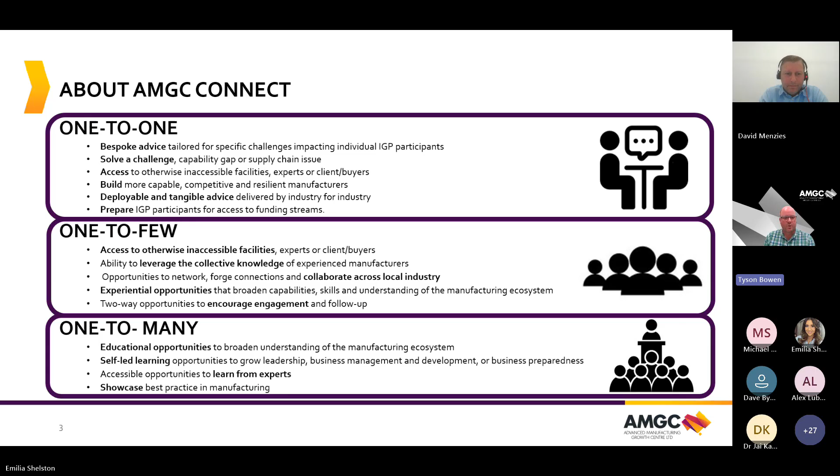Next slide, please. And today we're joined by Dr. David Menzies from Additive Assurance. Additive Assurance is a company that AMGC knows well. We worked with them to help in part commercialise their product. And their product and services is all around guaranteeing and assisting with the quality of additive manufactured products. So I'm not going to speak for much longer because you're here to hear from David and the team. We will now switch our slides from AMGC to David's and we'll get underway.

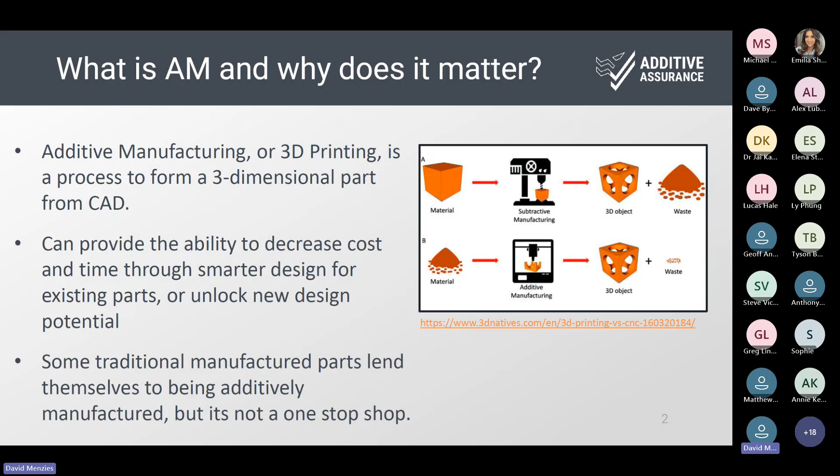So additive manufacturing, there's a large swathe of different techniques here. Some of them are suitable for different processes. A lot of them have started off as a prototyping tool, but are now moving into production. What we're going to focus in on is powder bed fusion, and in particular the laser-based powder bed fusion, which is the area that we operate in, which is largely referred to in general as metal additive manufacturing.

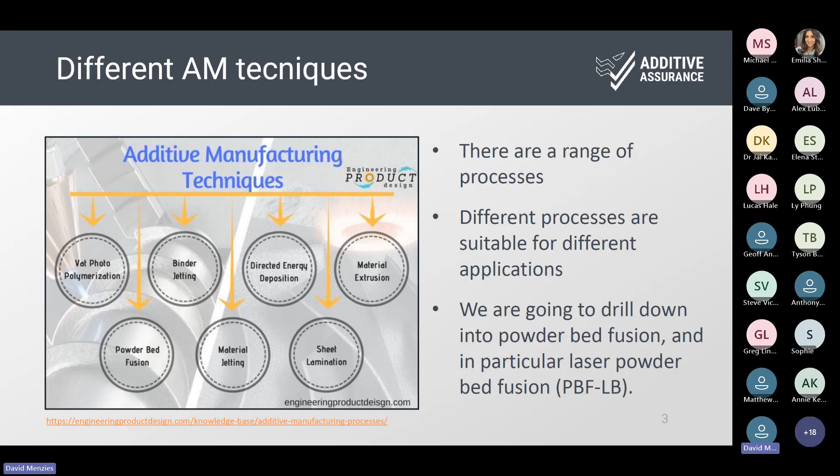So for those not familiar with it, it's effectively a bed of powder that is spread across a building plate, and that's done with a recoating bar, and then a laser scans a pattern on that XY plane, and then another layer is deposited, and then the laser is activated again to start building that part layer by layer. These machines obviously started with a pretty small build depth, but they're now moving up to around 2 meters in depth to build very large parts.

Having said that, most machines that are in deployment to date are still the smaller format machines, where you're looking at around 300 millimeter by 300 millimeter XY plane, and a depth of anywhere around, say, 400 to 500 millimeters.

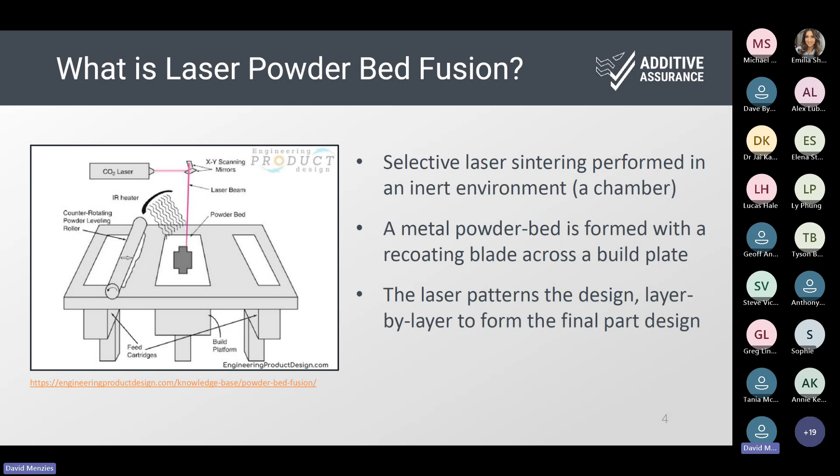So scaling from prototype to production has been the challenge over the years. Obviously, there was a lot of early adoption of these processes, and they were largely focused on that prototyping phase. There was a large take-up from the research community to unlock new potential, but some of the more critical industries like aerospace, defence, and medical took on these capabilities quite early on to understand whether they can get any advantages over their traditional manufacturing routes.

What's happened over that sort of 20, 30-year journey is the machines have improved a lot. The quality of the powders has improved, so less contamination, which creates defects. The number of alloys that are available has dramatically increased to expand the window of production for these machines, and early producers broke through those critical regulatory barriers.

What's happening in the regulatory space for this is there are some changes occurring with ASTM and NASA standards, which I'll talk about later, which really puts a bit more emphasis on monitoring the build as it's going, as opposed to what has been occurring in the past, which is more post-process inspection.

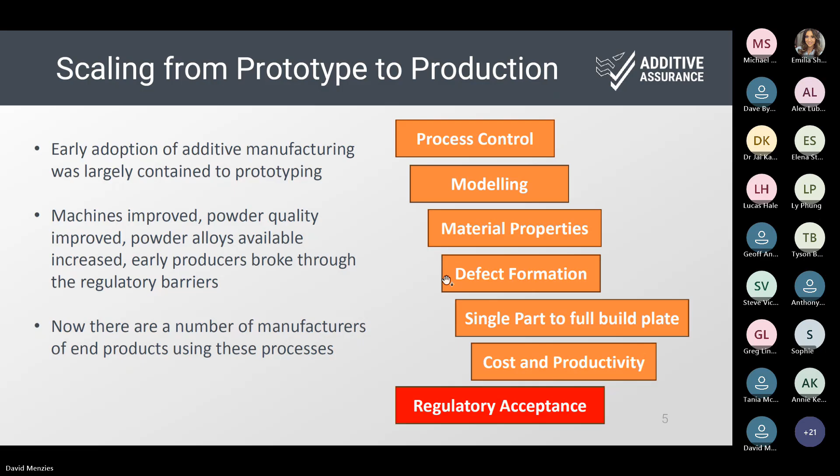And in energy, so energy is one that's very similar to the example with aerospace, where multiple parts are consolidated to improve the overall cost and productivity of the final product. But those ones are getting unlocked further and further now that the powder bed fusion machines are getting larger, which unlocks a lot more design consolidation opportunities for those manufacturers. So we're seeing quite a lot of improvement in the quality across these manufacturers.

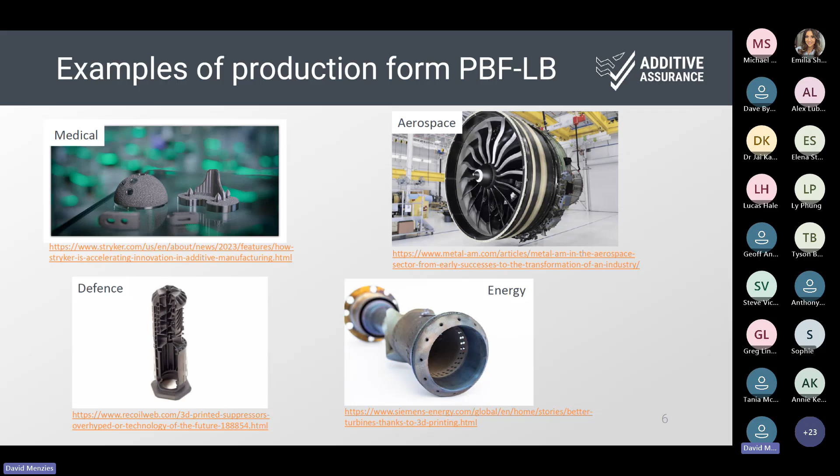One area though that has held back the industry to a degree has been really how to assure that you have the right quality, which is what we focused on as a business. So obviously with complex shapes possible, traditional inspection can be hard, especially with denser alloys. It's very hard to CT scan very thick bits of Inconel, for example. So what happens is testing coupons are printed next to a part to use as an analog for part quality. So it's not a direct measurement; it's an indirect measurement, which is fine. It's approved by the regulatory bodies, but it is not a direct measurement.

These parts are now getting bigger, which makes it even harder to do a lot of the traditional inspection. So there is a lot of push within the industry to work out ways to not remove post-process inspection, but to adopt these in situ monitoring techniques to cover the areas that can't be traditionally inspected. Which comes to the final question of how can you adequately sign off the quality of production, which is the opening topic we have with most of our customers.

So there's a few different common techniques that are used in particular in laser powder bed fusion. There's optical imaging. A lot of the machines come with that already built in to really monitor that powder bed to check that it is not getting disturbed. So that really just gives you some geometric information, which is helpful. There's infrared thermography, which is a field that we sit in, which is looking at that melt pool, so where the laser is melting the powder, which is where your defects are formed.

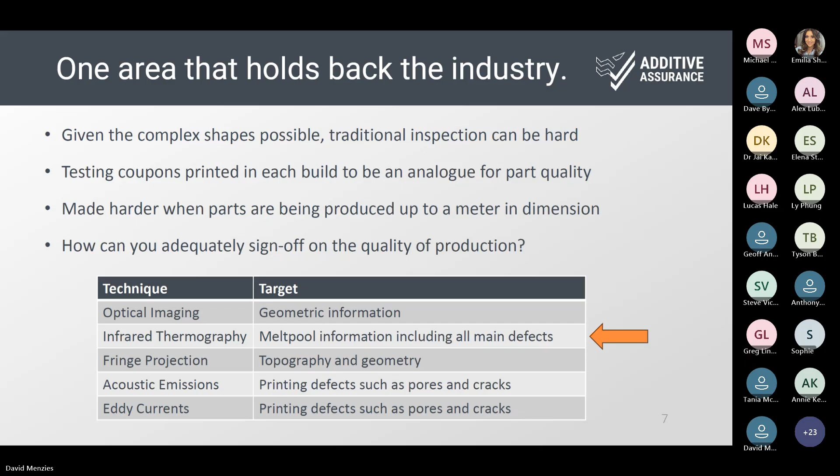So we've developed some machine learning algorithms to take that raw data, re-stitch it all together as a single image, and then really start tracking the defects as they form in that Z direction as you get that layer by layer production occurring. And to visualize that, there's a software package that allows for fault identification and the ability for operators to either cease production or to make some changes to improve the quality outcome.

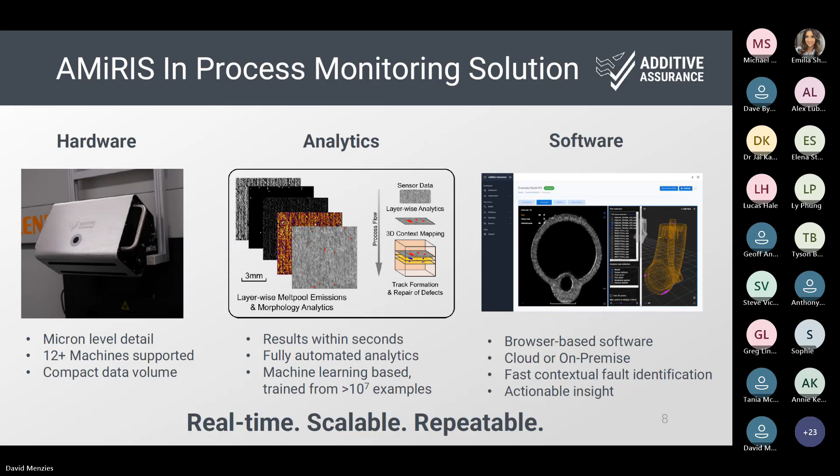So on this image here, that's a Renishaw machine. So what we have there is our sensor package. It's looking through that build chamber window that you may be aware of on the front of these machines. We are looking in that near infrared range, so the build chamber windows typically don't have any filtration there, which means that we're able to look through that window. We've got a mounting setup that takes probably less than 30 minutes to get on. There's obviously some calibration that occurs after that.

With the machines in this category, there is anywhere between 1 and 64 lasers that are shooting the build plate. Obviously 64 is an extreme. I think there's only maybe 1 or 2 examples of that in the world. Most are between 1 and 4 lasers. And obviously with an imaging technique like this, we're able to resolve that without having any interference with the number of lasers. And it doesn't affect the machine warranty on those machines. So we're not breaking into the hood to then mess about with the setup, which would then get you back to a position as a manufacturer of needing to qualify your production machine again.

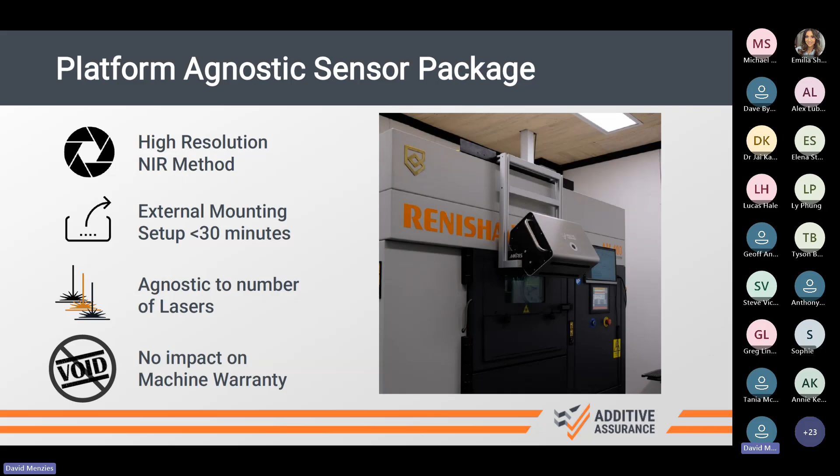So this is just, I guess, a snapshot of a couple of the different machines that we operate on. There's a couple of variants of our product to cover different machine sizes, but it is something that we are using across a range of the machines across the sectors that we operate in. So these machines, we're manufacturing them in our site in Oakleigh South in Melbourne.

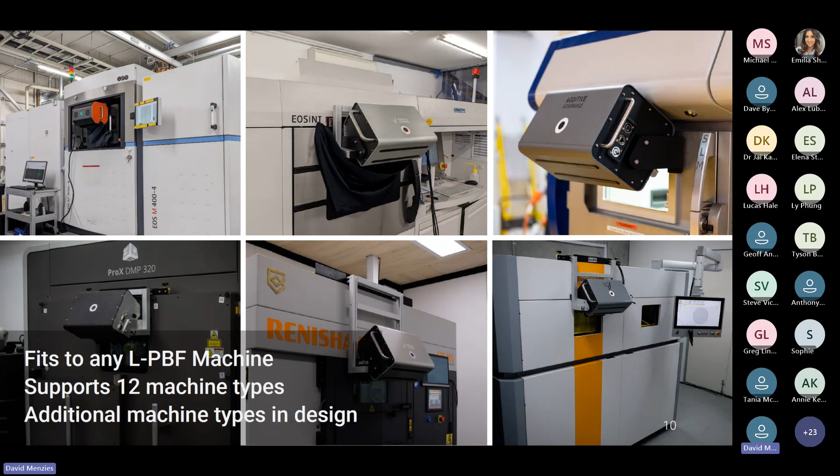But I guess moving down to the nuts and bolts of it, we're looking at that melt pool layer. So we're resolving that build plate in a long exposure mode. So we're taking that entire layer of information across those 8 cameras, stitching it together and getting a resolution image of 30 to 40 microns per pixel. That variation is really dependent on the industrial design of the equipment that we are operating on, depending on how close the window is to that build plate, effectively. So what we can see is effectively all the different types of defects across that melt pool layer.

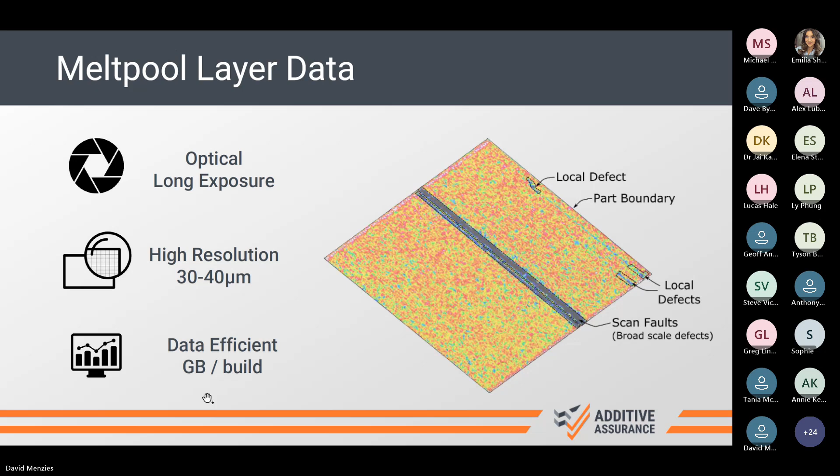That is a false color image. We are seeing black and white through our lenses, but it's obviously easier to see that in color as an operator. So what we get on each individual layer here is melt stability. So you can see there's different tracks going in the top to bottom direction there. That is the laser activity that's going across the melt pool. It's effectively a welding technique when you boil it down to it.

And what we're looking for is changes in the geometry of those and the intensity, which is effectively what we call a texture. And through that texture, we can then determine if there are any defects occurring. Obviously, in a single layer, that's interesting. But if you are seeing it in the exact same XY coordinate across several layers, then you know you've got a problem occurring that needs to be actioned as a manufacturer.

So the common defects in laser powder bed fusion that we're targeting are lack of fusion, which creates pores, keyhole collapse, spatter, which is obviously a problem when you have balling occurring across your build. And we can also see more sort of macro geometrical issues, such as those that are occurring in that powder layer from the recoater, or whether the part itself is having any level of distortion or warping occurring.

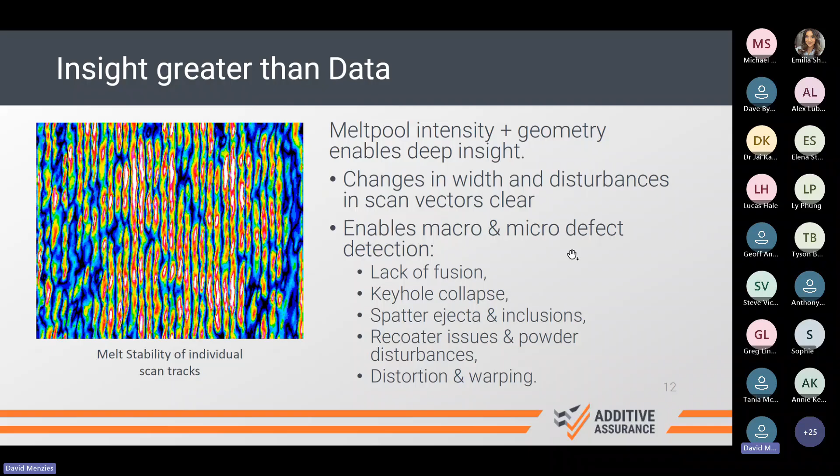I've used a PDF here as opposed to my PowerPoint. So on the right, that should be a video, but I know it would crash if I was to use that version. So I've just flattened it down to a single image. So it's a bit hard to see what's going on there, but there are two different colors of blue, and they are looking for pores within a test coupon there that are occurring.

So those pores are anywhere between 50 and 500 microns in size, and we're able to detect them with a 95% confidence down to 82 microns, which is a lot better than other techniques have reported, which is more around the 500 micron level. And especially with lack of fusion, the defect size that becomes critical is a bit larger than that resolution. So anywhere above 100 microns is where you want to be able to have a lot of confidence that you are seeing an issue.

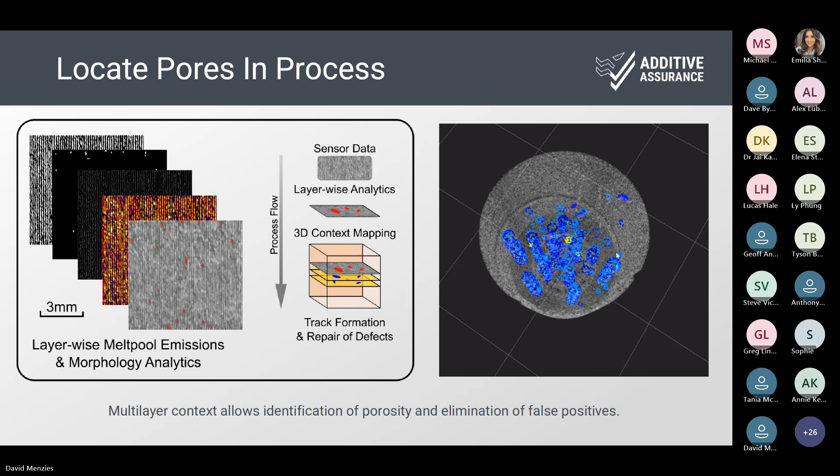Again, I've flattened this image. It's a little bit easier to see there, but this here is looking at CT data correlating to our data that we are generating, and you can see there the darker blue spots and the lighter blue spots, that they're all on top of each other, unfortunately, in this view. But the correlation of those is extremely high, which is the source of the data of how we can achieve the 95% confidence interval of around 80 micron defect size using this technique.

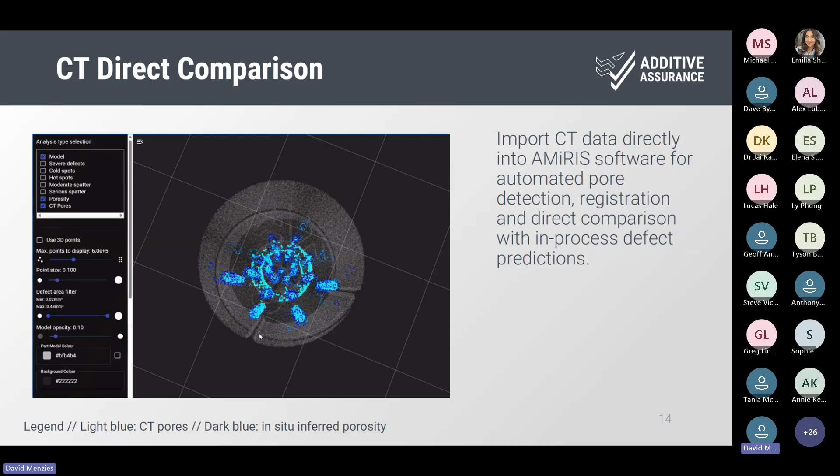One thing in manufacturing is obviously being able to identify a problem early. That's across any manufacturing technique, whether it's printing or milling or anything. In this context, with laser powder bed fusion, it can be quite a slow process if you're building something quite high. And if you know something is going to create a problem later on, you can stop that production at that level.

And this is one of the areas that is interesting to a lot of laser powder bed fusion manufacturers, regardless of the level of regulation across their production. So what we've done is we've tried to make this as simple as possible from a user perspective. So we end up with results of each layer within seconds of that build. That analysis is automated and issues are flagged.

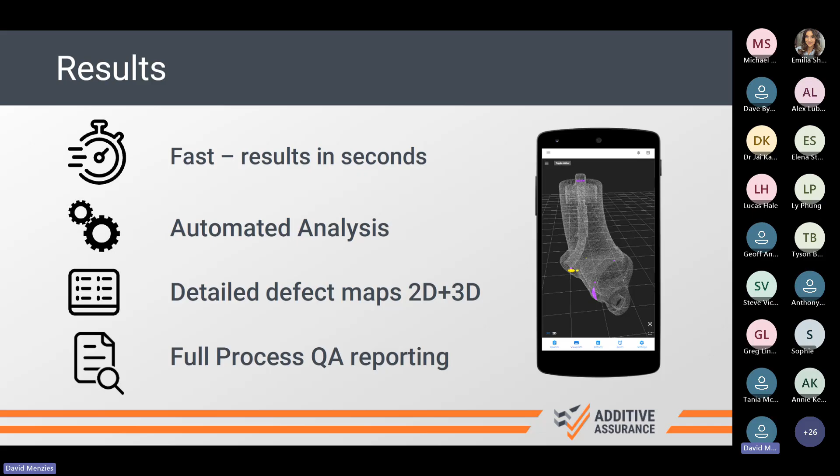Here's an example of some automated reports that can be spit out. This is a pretty simple one, looking at some bottle openers. Basically, there are 10 parts which we've called A grade, 30 B grade. Being a bottle opener, they're all fine, but 2 parts have failed. So this is really a technique to allow the quality department to effectively put the parts into different buckets for inspection, either directly pass them or investigate further.

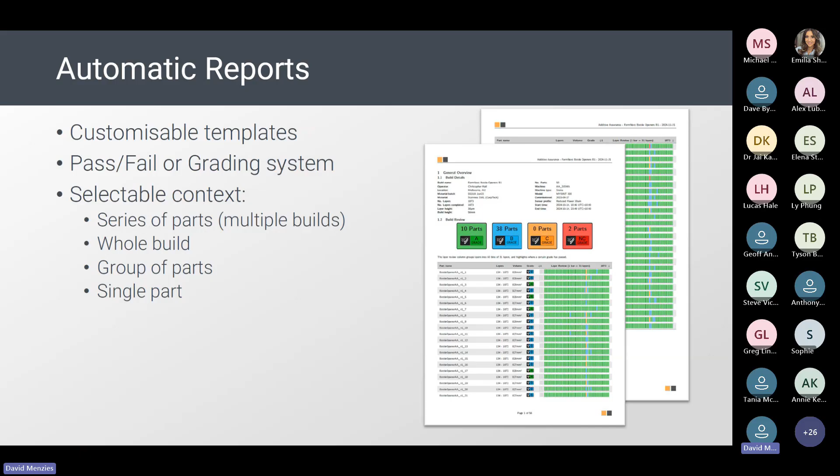And one other technique we've put into play is gold standard comparison. So that's scanning a part, having that fully qualified in production and in quality inspection, setting that as the gold standard, and doing direct comparisons of all subsequent production of that part across all build plates to then effectively give a go, no go, or pass, fail criteria to each of the parts across that build.

And, wow, I raced through that, Tyson. I thought I was going to take another 10 minutes. That is the end of that presentation, but I am more than happy to take on as many questions as there are. No problem, David. It's good listening to it, and yeah, sometimes the time does fly, but that gives us a good opportunity to tackle some questions as well.

So we'll leave your details up on there for a moment, and then we'll flip over to another slide thereafter. But there is a question that was posed almost as we got underway from Peter, and Peter has two questions. The first one is, can lines per inch, and he's got in brackets 13,500, be achieved with 3D printing? And I'm not sure if this is directly in your wheelhouse, David.

It's probably not in my wheelhouse. I'd have to do some mental mathematics on how to convert that across. But the typical scan tracks that are getting used for these are around 100 to 140 microns, if that is comparable to the